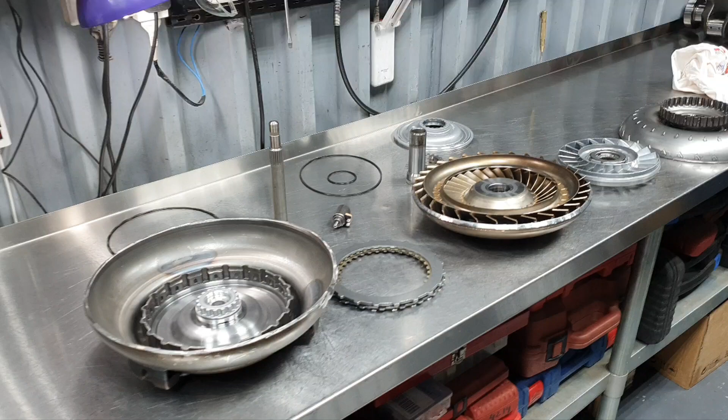Today, still I'm thinking about the torque converter. I'm just trying to figure it out. I'm not gonna be able to spend so much time with that because I'm busy with other things. I'm just trying to put the pieces together. Now,

meanwhile, one friend places a comment that when he starts the car and he's engaging, let us say, the gear, it has a rough start. It's kicking while it's cold. And when the oil is warming up, it's fine, it's smooth. Okay? Now, when you're talking about cold, I don't know how much cold you're talking about. Cold start with 20, 30 degrees, or cold start minus 20. This has to do with the viscosity, the oil viscosity.

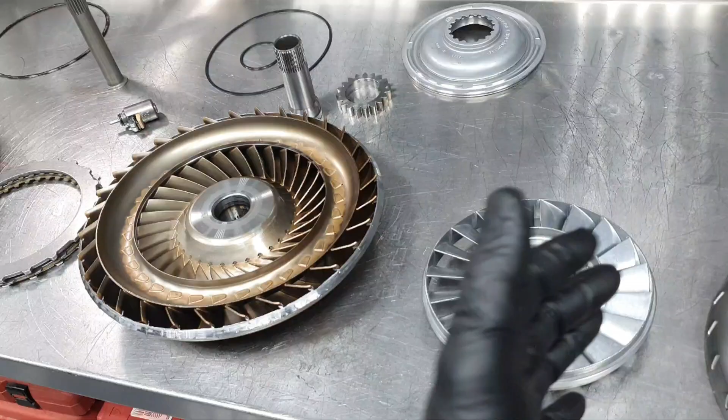Now, this video is gonna be also for me, just for my reference, okay? So, what I did yesterday is strip off completely the torque converter, just to understand where the pieces are coming from. Still, up to now, like I said yesterday, I see only that.

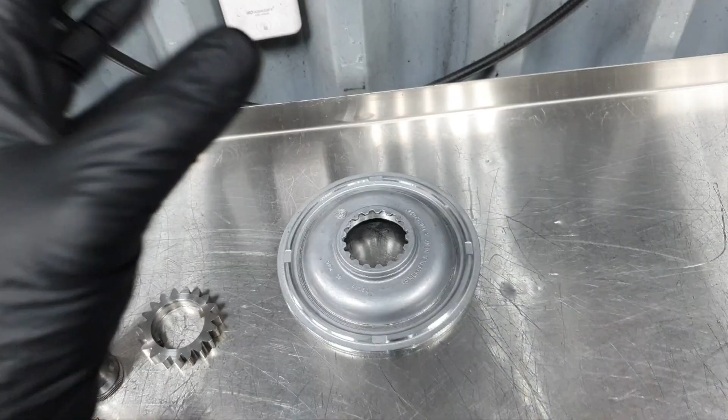Let's put it together. This piston goes here. Now this goes easily inside because I have removed the O-rings, the seals. The seals are here, that's why I can move it in and out. The operation of this piston is like this, up and down. When this one comes up from the hydraulic pressure, it's squeezing the clutches, it's engaging the clutches. When it's down there, it's disengaging the clutches.

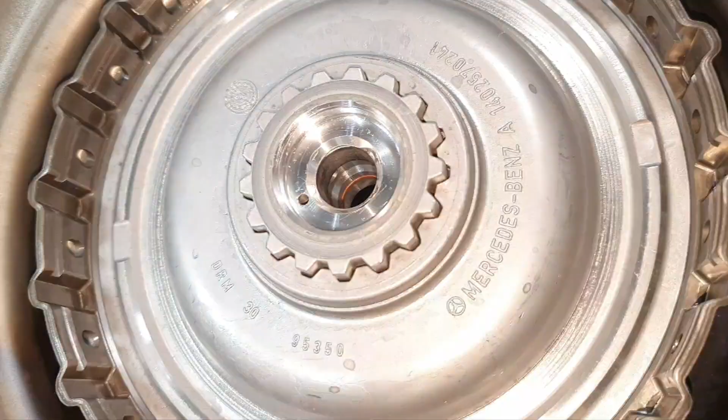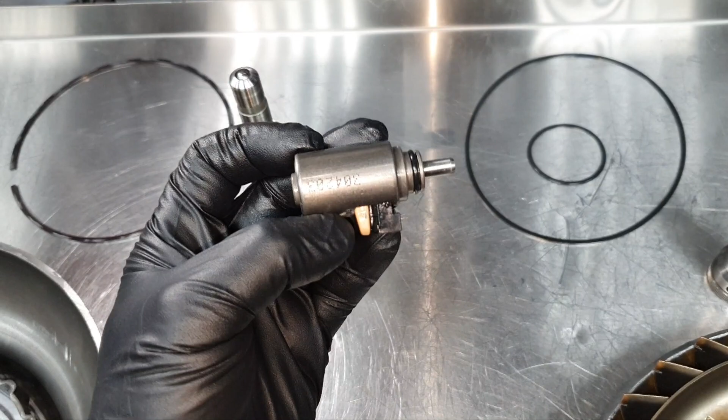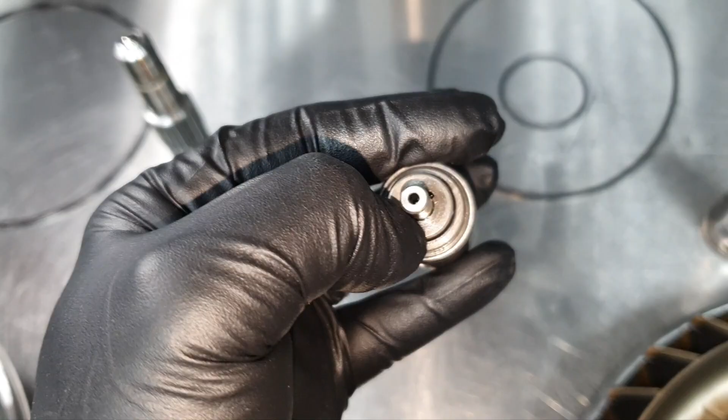The oil pressure comes there inside. There is one hole over there that goes and meets this hole. And oil pressure comes from this hole here, and this oil pressure is being controlled from the TCC, torque converter clutch solenoid, okay, from this one. It's opening the path, the fluid comes from this side, it's opening the path around here. You see the two small holes here and the small hole here in the middle. So it comes from here and it's escaping from there. Let me show you what I mean.

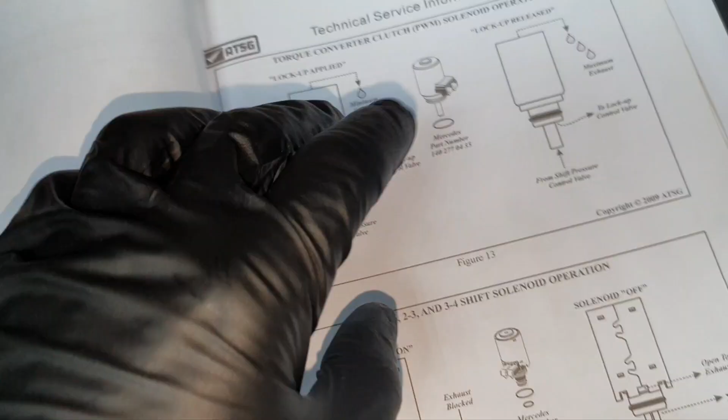From shift pressure control valve to lock-up control valve. That means it comes like that and comes out like this. Okay, up to now. There is a rate of leak here. It's not exactly 100% airtight, let us say. There is a rate of leak from this solenoid. And there is also the maximum exhaust. That means when you have so much pressure when the oil is cold, or for whatever reason, it starts escaping some oil pressure from here up. It's like a safety, so it doesn't squeeze the clutches so much.

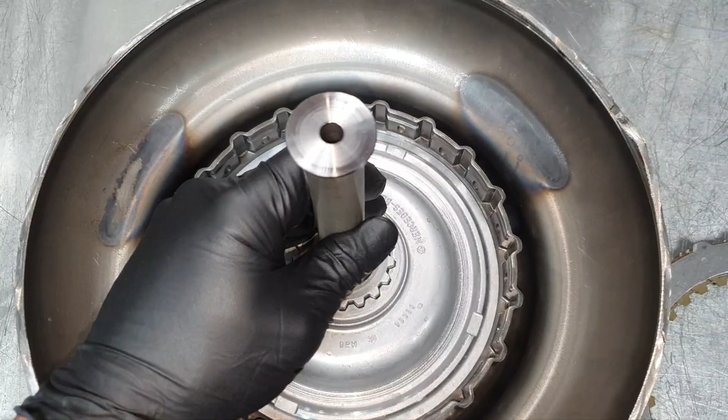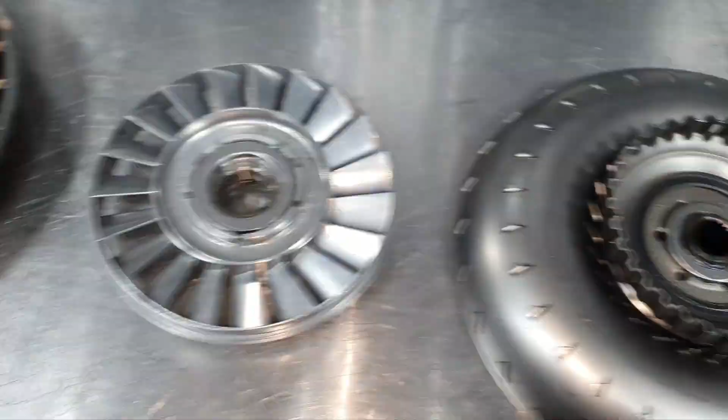Then, when you put inside, let's call it the input shaft, it comes nice and tight inside. There is a small rate of leak from the metal to metal contact. Forget about that. But there is also this small tiny hole here, that also has a rate of oil leak. And it's been calculated, probably. Otherwise, you're not gonna engage the clutches. Behind this hole, there is this bearing here. Now, did they do that for lubrication and for adjusting the pressure? Maybe, it might be.

The thing is, if you block this hole, the engagement is gonna be very fast, because this is being calculated as a rate of leak. If, let us say, there are pieces inside here and they block this one, all the pressure is gonna end up inside this area and you're gonna push the piston fast. You're gonna engage it fast.

That's one thing. Second thing, if there is garbage on this solenoid here up, or if it's clogged, or if something passed and reaches this point, but the other path here is open, I believe the same thing is gonna happen. The forces are gonna be much harder, instead of the transition being smooth. Instead of giving the pressure to the clutches gradually, it's gonna be much more sudden, and it's gonna engage more.

Now, the same thing is gonna happen if you use thick oil viscosity. If the viscosity of the fluid is very thick, on a cold start the oil pressure is going to be much higher, and it's going to give you the same results. That means it's going to engage rapidly, it's going to engage so fast, and it's going to give you a hard shift, if you like, or you're gonna kick on the first gear.

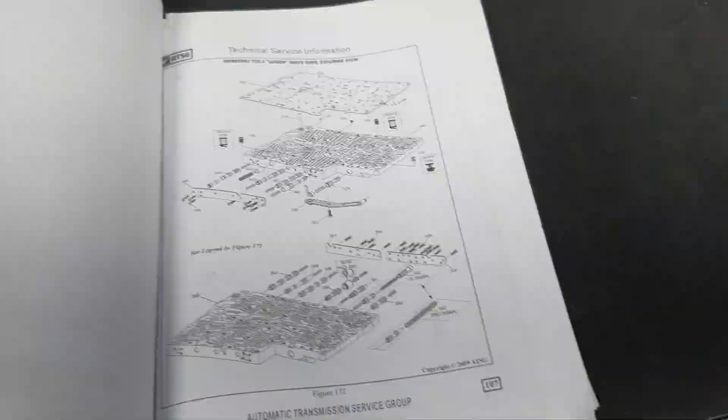That's my guess. That's my conclusions. Okay, I might be completely wrong. But that's what I see and what I have seen from the technical service information, how it's working, how it's controlling through the valve body. If you go through all this, you're gonna see how it's working, how it is activating. It's not something crazy. It's controlled electronically.

That means on the 722.6, since you don't have the TCU inside of the transmission and it's outside, you can find, let us say, the pin, and you can put a switch on and off. One example. You're gonna confuse the TCU because there are the speed sensors and you're gonna throw a fault, definitely. But I'm just saying, or you can put a shift light at 2000 RPMs or 3000 RPMs to lock up the clutch at 3000 RPMs, for example. You can control it through an adjustable shift light, and you can lock up the clutch at the RPMs where you want.

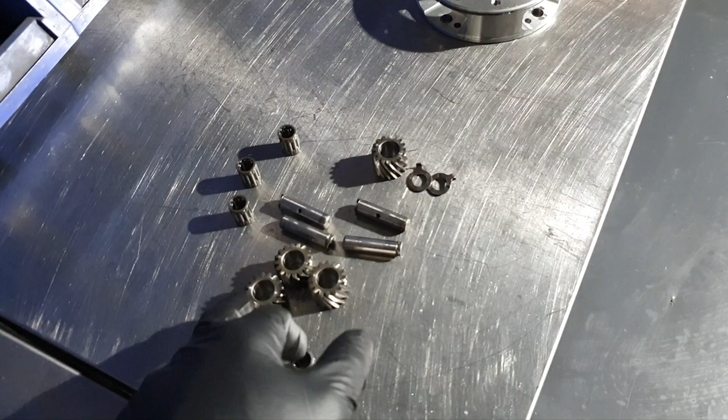Now, again, I haven't found where these pieces come from, this piece from the inside of the transmission. It was not clean before, let us say. There were some pieces, not so many, in the drums. Some of the clutches were perfectly clean. Pieces I found inside of these gears, especially one, like I said yesterday, that was seized. It was not turning freely, okay? That's one thing I found. The rest of the drums had some pieces inside, but not so much.

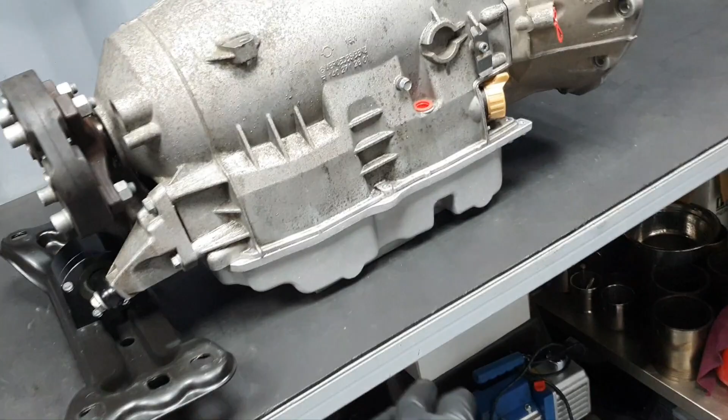All the metallic shavings were located mostly down on the oil pan. You're gonna tell me, yeah, it makes sense, all of them are gonna end up down there, right? Yeah. I'm saying that if something is rubbing, if something fails, if something comes apart, let us say if this bearing fails, you're gonna collect all the pieces here around. You're gonna see so many things, or you're gonna see this broken. That's what didn't show up so far. And again, only this stupid thing, and I don't know how it was before.

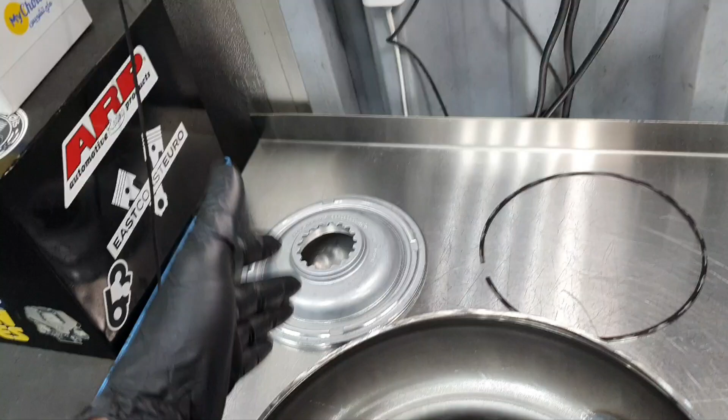What can I say? Now, for my friend who said that it's kicking when it's cold. You have the correct fluid, let us say. If you have a 722.6, because I don't remember the comment, you're talking about 722.6, try to put fresh fluid inside, 134 FE. It has a little bit less viscosity, but it's beautiful. It's not hurting anything. On the stock application, it's overkill, maybe, somebody will say that. If you have fresh fluid and it's still happening, remove the valve body, check the solenoid, clean it, if there is anything there or whatever.

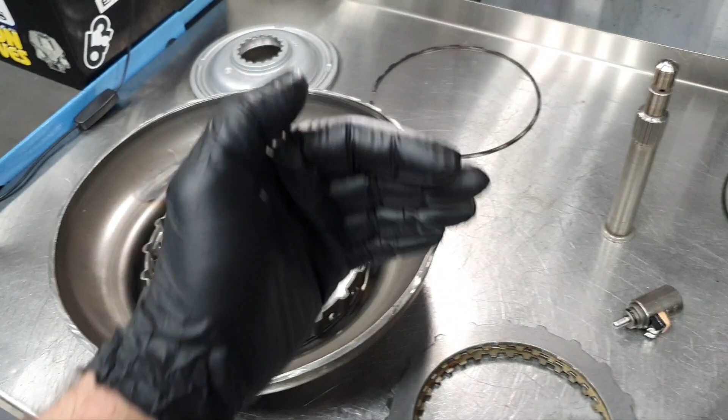There is another thing that's controlling. Wait one second to find it in the book. Okay, on the valve body, there is the mechanical side, if you like. There is the torque converter clutch damper valve, if equipped, and there is the torque converter clutch lockup regulator valve. It's talking about the 343 and the 344. That means we are talking about this one, 343 and 344.

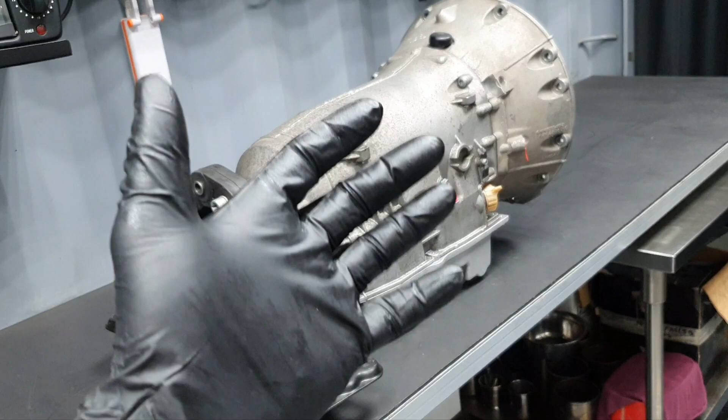This has to do also with the spring, but again, since this is happening only when the fluid is cold, on a cold start it kicks, you don't want to mess with the springs. Somebody tried before and was not successful. It's giving you only problems. Then there is the shift command valve, the 347, first to second, fourth to fifth. The 347, we are talking about this one.

That also has to do with the spring. I mean, how much tension has the spring? Do not modify any of this. Okay? So it's not only the rate of leak from this hole or the solenoid itself, it has to do also with the fluid, and also with the springs on the solenoids, on the manual solenoids, if you like.

Yeah, you can call it solenoids. Yeah, it's acting as a solenoid because it makes adjustments, yeah, okay, it's hydraulic, controlled by the electronic solenoid valve.

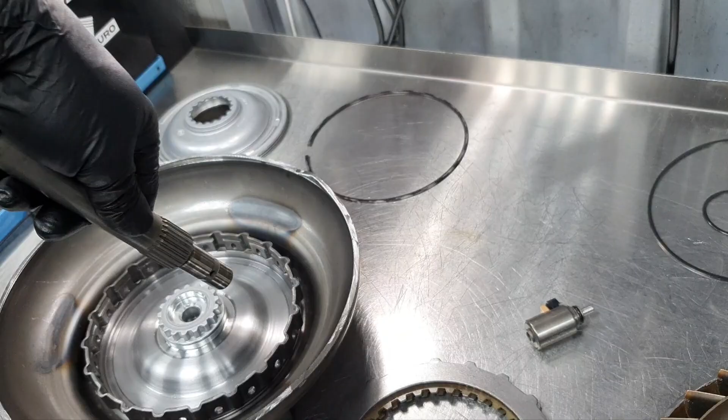So, but again, as soon as it comes to operating temperature, since it's shifting fine, I'm gonna suggest to check the fluid, or if it's very dirty, let us say, to clean the valve body, the things you see me doing here, because there is also this ball here, I think number 4, yes, torque converter clutch. It's 5.4 millimeters. Okay, it's a steel ball and it's located here.

It's worth it, let us say, to clean it up, to reset the adaptations for the shifting and do the learning again. It might be worth it. So that's it. That's it.

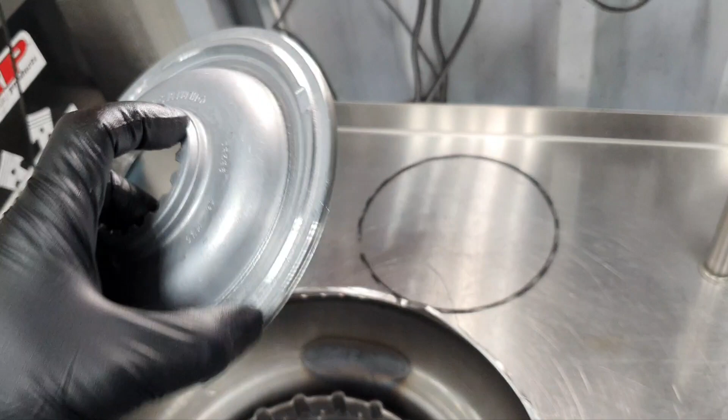Small update for nothing. Yeah, no, for my friend, for that gentleman who asked me why it's hard, and you are lucky because I still have it in front of me. In a while, I'm gonna put all this in a box and make it disappear from here because I need the space. I cannot have this here.